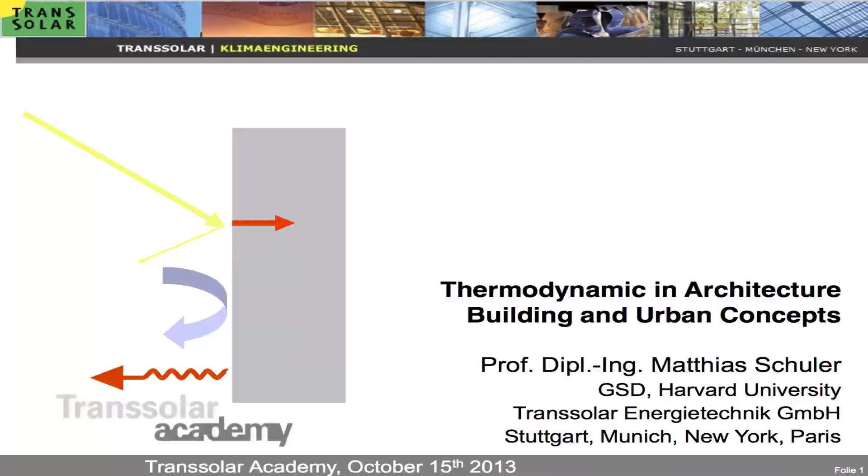It looks like sustainability is such an overused term that people feel like, oh my God, I have heard enough on sustainability. So if we start to call it thermodynamic, we may have a better impact on people. And I will just explain briefly how I define it.

What sustainability means for buildings and cities. Then our approach, you have seen already some of this from Thomas, and then I'm trying to explain 3 projects. Let's see how far we get.

The first one is a school, a design school in Essen we did with SANAA. Masdar City, you may probably know, that's this first carbon neutral city approach in Abu Dhabi. And then the Ansa Hospital is a hospital we did in Rwanda, which is not yet built, but conceptual work on it.

Okay, so defining sustainability for buildings and cities, we put definitely the people first, which means we first said, okay, our approach is to deliver high comfort for indoor and outdoor spaces.

I had an interview this morning where I mentioned why we focus on outdoor as well, because we are using more and more indoor space per person. The numbers for Paris, for example, they started in the 60s with 25 square meters per person. Today they are at 45. For 2030, they're expecting everybody needs 65 square meter living space per person mean value, which means the city is dying out because there are fewer people in the city.

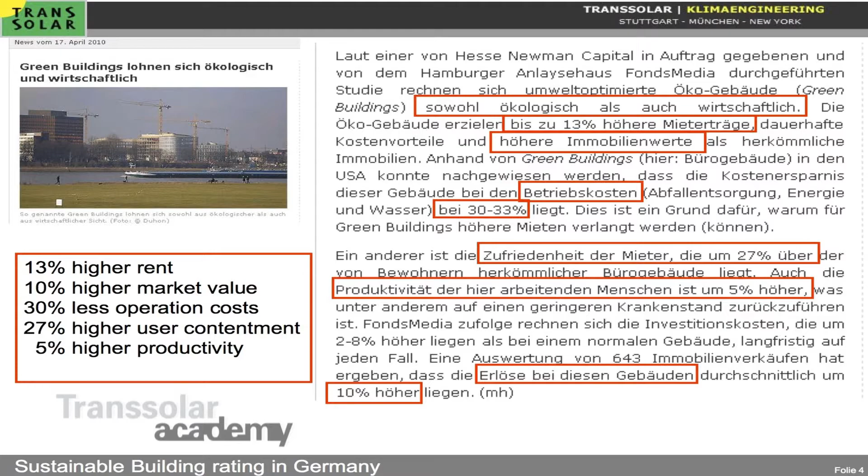So typically you get 13% higher rent, and if you get it on the market, up to 10% more market value. Typically the American evaluation for green building is that you spend between 5 to 7% more investment to get a higher performance building. So in a certain way you get a quite good payback, or at least it increases your market value.

You have around 30% less operation costs, which is quite interesting if you get tenants in your building, because they are running it on a lower cost. I think that's a big point, and Thomas probably mentioned it yesterday for Manitoba Hydro - people are more satisfied with the building, a better working environment, which is important because we build buildings for people to live and work in, and hopefully be comfortable. This kind of higher contentment leads typically to 5% higher productivity.

This is what American CEOs find quite interesting: if they get a better working place for their guys and get more out of them for the same salary, that's good business. This European number is interesting to have in mind, but the American number even partially goes up to 15%, considering their typical office can be in a basement without any daylight. If you put this guy at a facade instead, productivity can easily rise 15% because you feel much more comfortable.

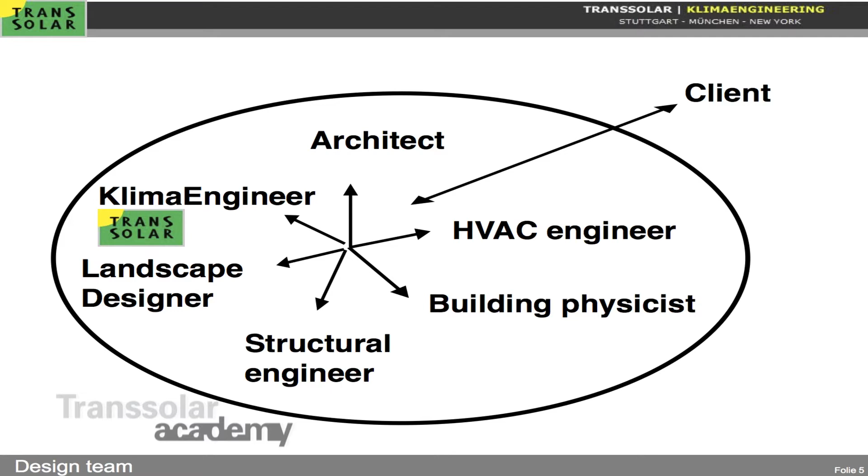We see ourselves as a player in a team. Some architects want to be at the top—I had another arrangement where the architect was not on top, and I got a comment from Peter Zumthor, who some of you may be familiar with. He got the Pritzker Prize in 2009, a quite known Swiss architect, but a big egocentric—he wanted to be up there above the team. But this is kind of how we see us.

We see ourselves really as a player, exchanging coordination information in the team. We are definitely not experts in building physics or structural engineering—we are experts in climate engineering. The information exchange necessary between disciplines is important, so everybody is aware that if someone changes one parameter on their side, it may affect another discipline in the team without them realizing it. It's important to push this sensitivity in a team, to exchange this information and get people on the same level.

If we approach a building with respect to indoor comfort, there are different aspects. It's not classically the air temperature as the definition, but more like the operative temperature—the temperature you feel, which has a lot to do with surrounding surface temperature. Even in the American code, they talk about room temperature, and if you look it up in ASHRAE, they mean the operative temperature, not the air temperature. A lot of people misinterpret it as air temperature.

You've seen this—these are our tools: simulation, temperature, airflow, and light, where based on these physical principles we evaluate our concepts, which takes a significant part of our time.

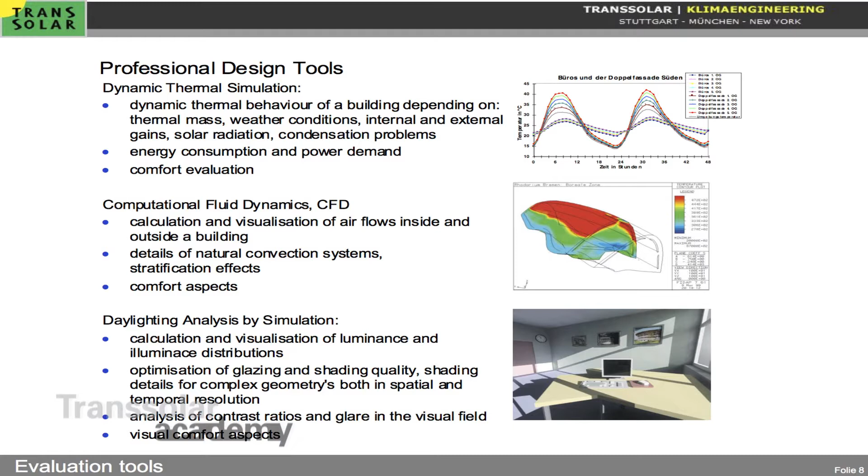From time to time we even use one-to-one test measurements, because if you build a big building and propose something and it wouldn't work—some clients feel much better instead of just seeing a fever curve, which makes them nervous, being able to walk into a space representing the concept they'd get at the end and feel like, okay, it looks like it can work. It won't give them 100% security, but a much better feeling.

Jumping into the real projects, this is a project in the middle of Germany. What's interesting in respect of sustainability is that this was an old coal and iron mining site, in the center of Germany, in Essen. This is a UNESCO World Heritage site.

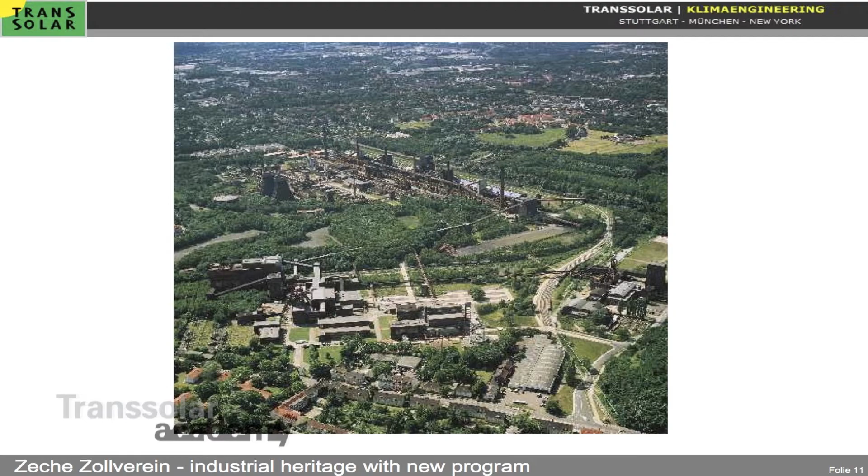This is where they changed coal into coke, a special kind of coal you can run at high temperature to get the iron out of the ground. This is an old mining site—they dug for like 85 years. The Ruhrgebiet is in the center of Germany; this was our main industrial ground where they dug and produced steel.

They dug for like 85 years, and in 1985 they closed this mine. Out of political reasons, it became cheaper first to import coal, then cheaper to import steel, so the German coal and steel industry nearly died out. The whole region is still struggling because they lost their main industry.

Then they started new activities there—one was to do education there, and there was a competition.

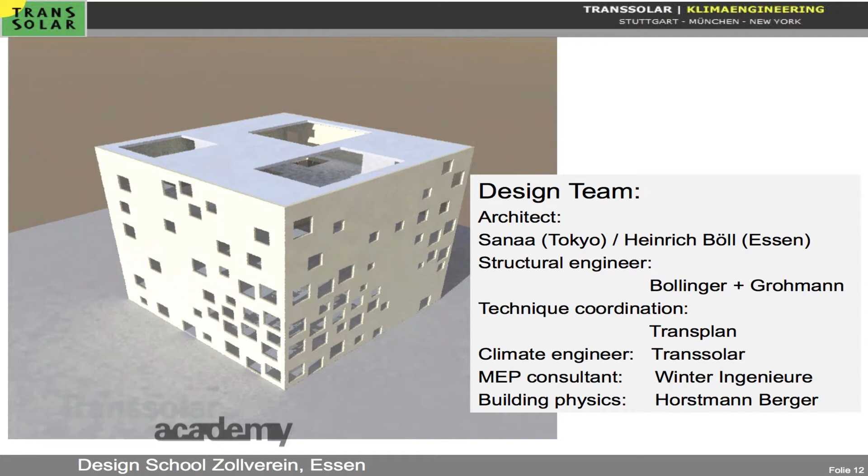That's the team: SANAA stands for Sejima and Nishizawa, two architects from Tokyo, and there was a local architect, Bollinger Grohmann, the structural engineer. Transplan is a Transsolar daughter company that does technical general planning and coordination. We did the climate engineering, an MEP engineer, and the building physicist—so that was the team.

They won the competition with a block. The building is 35 by 35 by 35 meters, so it's a perfect cube.

It's about 300 meters from the old shaft. Now what's interesting, in '85 this is where they went down to minus 1,000 meters. This is how deep the mines are in the Essen area.

In a certain way they stopped it, but they decided, for political reasons, since all the mines are governmentally owned, to close it but keep it dry. I'm jumping over the weather in Essen because that's a boundary condition to think about. But I think this is the 1,200 meter down there.

Now what they're doing, they're pumping permanently. They closed it, so they're not digging, but they're pumping day and night, 24/7, the mining water out to keep the mine dry, so maybe in 10 or 15 years they could decide to go for coal again. If they flooded it, it would be a bigger mess to get it dry again.

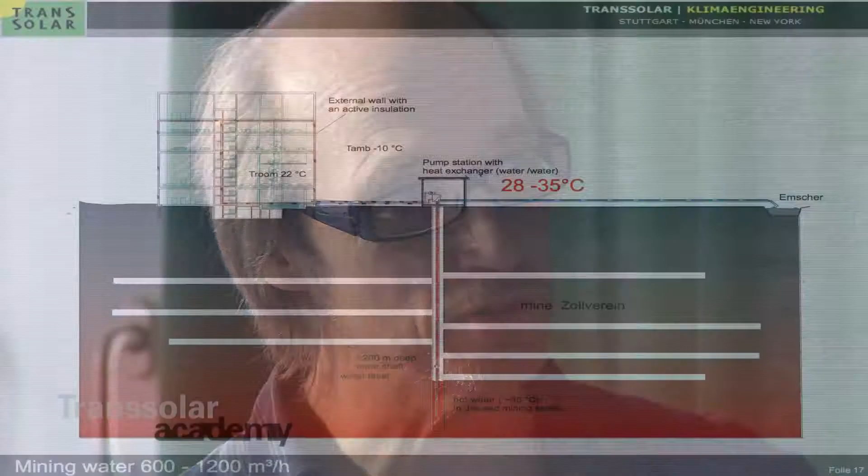What's interesting now, they're pumping out around 600 to 1,200 cubic meters per hour. That's a big amount of water. Now this water is between 28 and 35 degrees. It's warm. And it's heavy metal loaded.

What they do, they pump it into the next river, which in the first moment you think, give me a break, it can't be. They pump it into the next river. The Emscher is what I would call a public cloaque in Germany.

15 mines are dumping their mining water into the Emscher. Before the Emscher goes into the Rhine, there are 15 water purification stations to get the shit out. And this is working day and night, and will work for however many years to come.

Now, this is quite interesting because this was coal, they closed digging like 30 years ago. What's interesting is, they say, why don't we stop pumping? But if, maybe for political reasons, they find a new energy source, whatever, fusion reaction or whatever, the water would fill up.

What's interesting to have in mind: the whole Ruhrgebiet dropped between 20 and 30 meters in the last 100 years, because getting the coal out and the iron out, the whole landscape dropped. Now what's interesting, if they got the water up to around 200 meters, the ground would start to lift.

And there's one mine close to Aachen, near Cologne, where they did it. And there's one little village where, through the streets, through the houses, they have a shift of like 10 centimeters in one year, because the ground kind of lifted up uncontrolled.

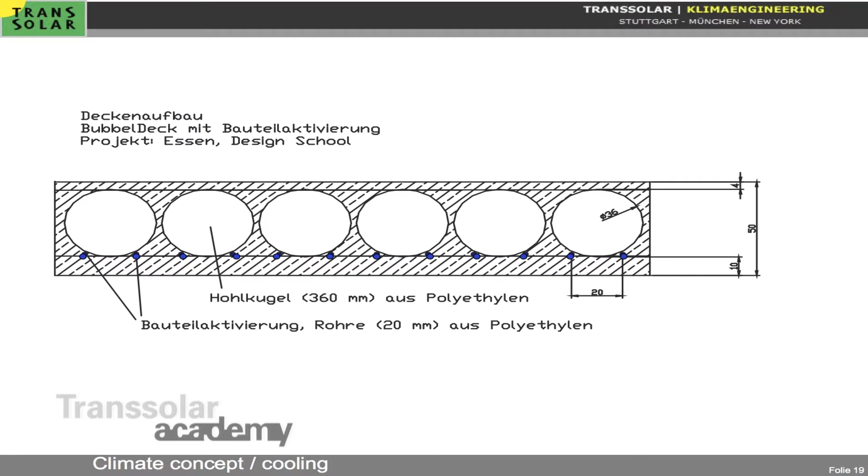They span 24 meters without a column, because Mrs. Sejima didn't want to have a column in the space. So they are 0.5 meters thick. Now, to avoid 0.5 meters of solid concrete, which would be a lot of dead weight, they used what's called a bubble deck. They put hollow core elements in, which take out around 35% of the dead weight.

Now we put little plastic tubes in to activate the ceiling as a source, and if you pump water through it, it works as a nice heating device.

That was one application. Then reflecting the German code, in American units, structurally they would need around 25 centimeters of concrete to have a 35 meter wide concrete wall without expansion cracks, because the architects were quite minimalistic and didn't want expansion tracks. They wanted concrete at the inside and outside, which together with a minimal German insulation of around 10 centimeters would be nearly 60 centimeters thick. So the little windows they had became holes, because they were as deep as wide.

So they were totally unhappy and said, can we reduce the insulation? I said, I'll give you 2 centimeters, it wouldn't help. So finally we said, okay, let's invent something called active insulation. Now it's a 12-inch monolithic concrete wall without any insulation.

It just has plastic pipes in it, and we're pumping the mining water through the pipes. So we're heating the wall as if the building would be insulated, keeping the inside surface temperature at around 16 or 17 degrees, as the wall would be with 10 centimeters of insulation.

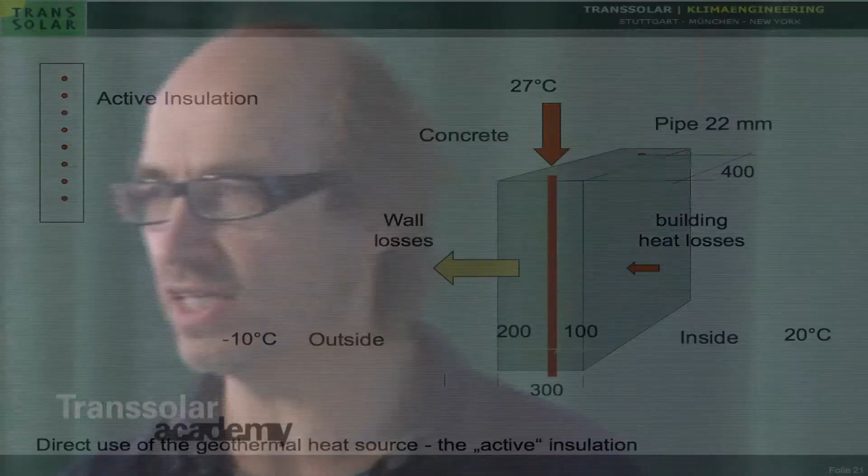It's clear we are losing like 80% of the heat to the outside. In a certain way we're limiting the inside heating losses, but we're still losing a lot of this free heat. So I said, before pumping it back into the mine, why aren't we using it for the building?

What was interesting as a side effect: we saved like 1.5 million in investment, because the double shell concrete wall was much more complicated to build than a monolithic concrete wall with some pipes in it, which the contractor found easier too.

This was an example where they asked for a reference, and I said, no reference, but we can show you that we think it should work. Make sure that if a pump fails, it doesn't break, whatever. So it was a big hassle, but we convinced them and got it built.

Finally, the loops aren't looped closed, they're open at the end. So in case of a pump failure, we can open a flap at the end and get all the water out before the wall freezes and breaks up. So that was some safety measure.

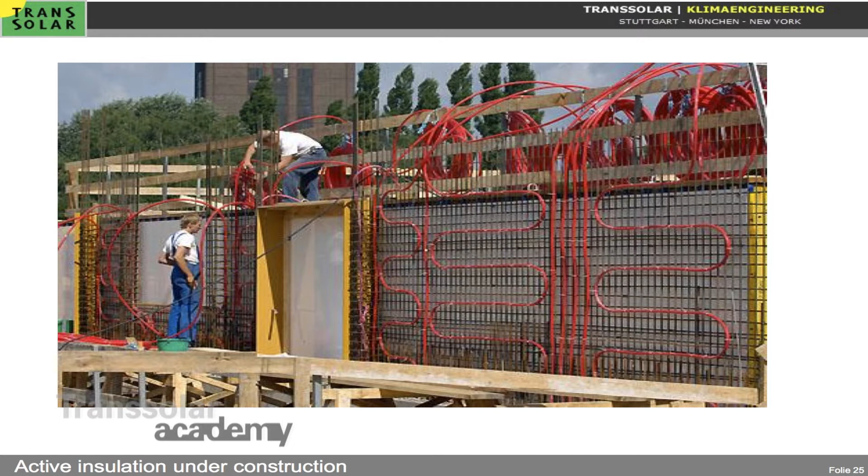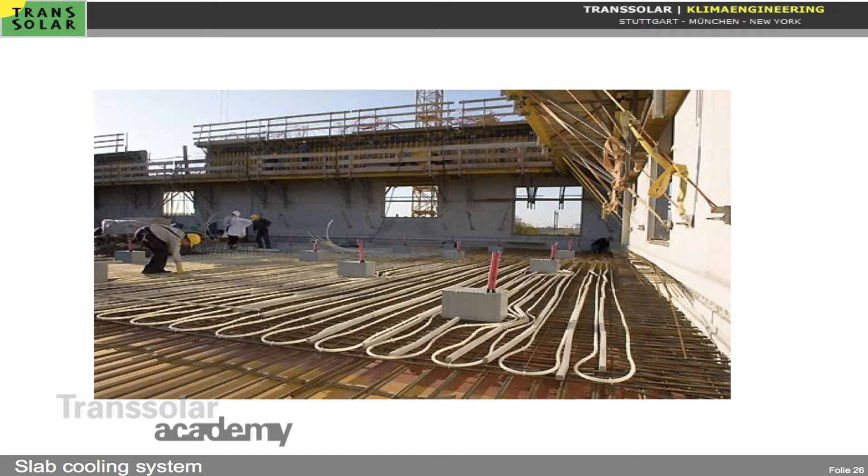As the building grew, you can see the pipes below in the 0.5 meter thick ceiling, where the bubbles come above in kind of cages, and then you pour the concrete above it.

Here you see a little manometer, a pressure control, because you're pressurizing the pipes during the concrete pour to ensure maximum stability, and you can always find out if you have a leak in the system, which as long as nobody drills in, we seldom had.

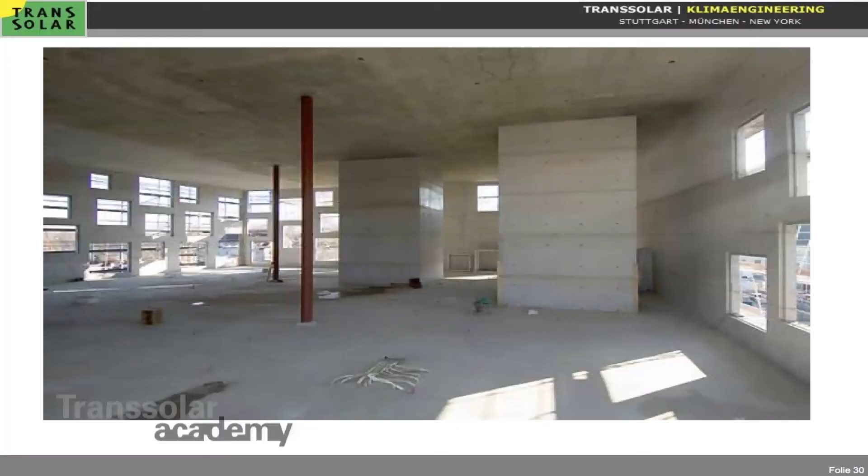This is where the pipes come out from the floor below. We typically have a raised floor, so you can connect to this embedded system. The concrete is all exposed, and you see finally they got some columns, but not as many.

The 12-inch, so the 30 centimeter thick wall, which is still 30 centimeters, but compared to before, with smaller windows, it was quite minimalistic.

Inside, the flush windows, flush to the inside, we said okay, we need shading because we still have around 30% openings on the facade. So we got a curtain which has like 10% transmission. This is enough for keeping the heat out and getting partially some light in.

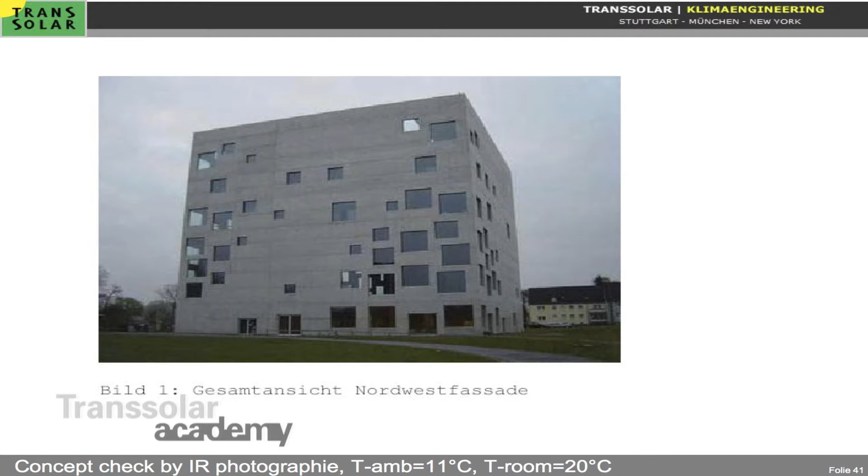What's interesting, not us, but other people did a check on it. Unfortunately it was not very cold, it was only 11 degrees, so they did an infrared kind of picture. And what you can see is the areas where it gets colder - this is the roof terrace. So the areas where you have the active insulation, even to the outside, are warmer because it's pushed from inside.

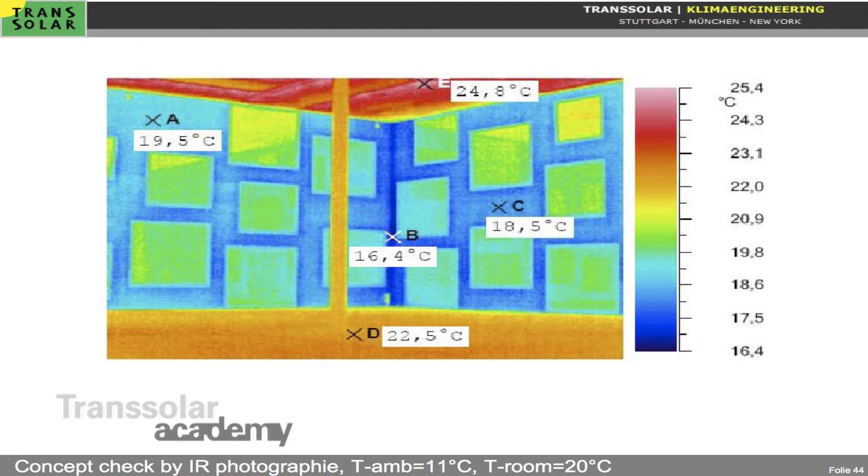Now, looking from the inside, what you can as well easily read is the warm ceiling, which is kind of your radiant source, and then the walls are tempered to stay in range. In the corner, it's clear you get the heat conduction maximization, you get more losses, but then at the surface you stay in the range of the room temperature.

Final picture, the curtain. Now, we are aware that an inside curtain, if the sun hits it, gets warm. How do you prevent that you don't feel close to a radiator? This is now about radiation.

If you put a kind of metal coating on it, a so-called low E, low emissivity coating, because physics tells us the heat radiation coming out of a surface is proportional to the emissivity factor, which is a material property. So if we do an aluminum-coated curtain on the inside, it may heat up, but the warm air would typically rise and be exhausted with the exhaust air. You sit here at the table and don't feel it, even though the curtain may be 30 or 40 degrees, because the low E coating cuts down its ability to emit heat.

What is interesting, in the infrared picture, low E, because the transmission is 0, becomes as well a high reflector, because absorption plus transmission plus reflection has to equal 1 — the Kirchhoff law.

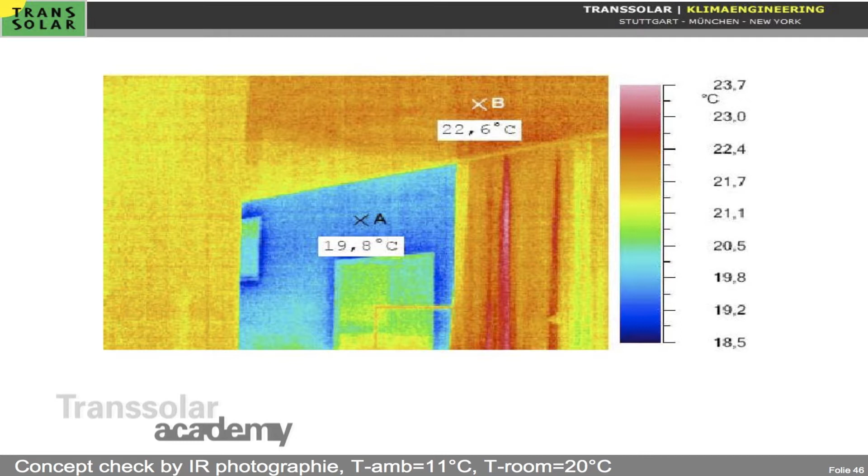So what you can see here, in the curtain, you're reflecting the warm ceiling and the warm shaft in the middle on the surface of the curtain. The curtain is not as warm as it shows in the picture, but it reflects the warm ceiling being reflected in the low E coating, which doesn't emit. But if something doesn't emit, it becomes a mirror — a long-wave mirror.

I think that's quite an interesting picture to look at. You can see that even in winter, the curtain would provide a certain increase in comfort, because you wouldn't see the cooler wall, which is at 20 degrees, but would see more like a surface of 23 or 24 degrees being reflected from the ceiling in the curtain.

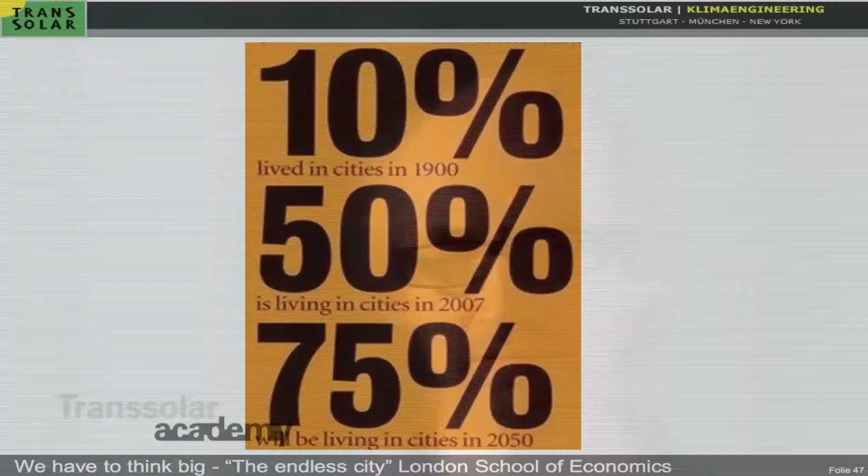Some of you may have seen this book. It's a good book — we have both books here. This is the first round, and then two years later they did a green one, from the London School of Economics. They called it The Endless City, evaluating the statistics of cities. In the first book they had about 10 or 15 indicators; in the second book there are another 10, about density, criminal rates, life expectancy, energy, air quality, and more.

They said we have to collect this material, because in 1900 only 10% of people lived in cities. Now we're approaching — in 2007 it was already more than half of the world living in cities. By 2050, it will be 75%.

The question is what is the definition of a city? Because if you go by the German definition, today 75% of the German population already lives in cities. So where is the range of a city — do you start counting from 1 million, or from around 100,000? I think that's a question to ask, first to clarify the definition being used.

That was a background for us to think about. We got an invitation from Foster and Partners to work on this — it was first a competition for the first zero carbon footprint city in Abu Dhabi. This is the team: Foster and Partners for architecture and urban design, Systematica for traffic, WSP with the energy concept and MEP, Flack and Kurtz, and ETA for solar systems, plus a landscape designer from Florence. So it was a big team working on this.

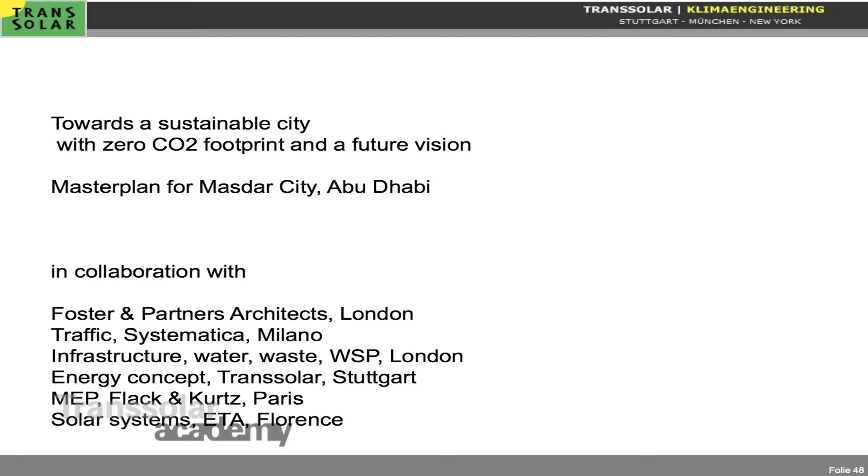The approach was to say, okay, this is Abu Dhabi today. What is interesting is this is Abu Dhabi in 1960 — this castle is right here, but there was nothing else, just this little castle and sand and some fisher huts. In about 40 years they changed from nothing to a city where you can already read a grid. Most interesting, this is exactly the grid of Manhattan — they copied it one-to-one.

This means you have an avenue which is 75 meters wide. I can tell you, to cross an avenue in Abu Dhabi when it's 47 degrees in the shade outside, and in the sun you face like 60 Celsius, 75 meters is quite long — you nearly don't reach the other side. This is why Abu Dhabi people use a car to cross the road; they drive to the other side to make sure they don't get a heat shock.

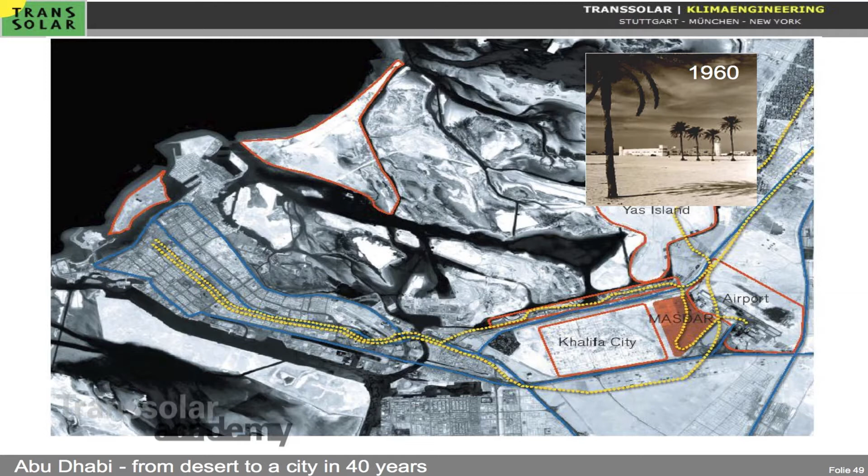I think this is an example where you transfer an urban design into a totally different climate, ignoring everything. So, this is Masdar City, close to the airport. If you've ever been in Abu Dhabi, this is the existing airport, and there's a new airport by KPF under construction here. Masdar City is a site of around 600 hectares donated to show the world that you can build a carbon neutral city today.

The background is that in 2004, the UAE were blamed to be the worst in the world, having the biggest ecological footprint per capita. Not in total, because they're such a small population - the Chinese would always win on that measure. The WWF does this every year, counting the ecological footprint per capita for each country in the world, and in 2004 the UAE got the red light.

What's interesting is this reflects a bit of Islamic culture - they felt much more blamed, not because of their beliefs per se, but because Sheikh Zayed, the father of the current emir and founder of the UAE, had emphasized that what your forefathers defined for you and for the future is quite important as a rule. He defined that you should treat your country as your forefathers did, and respect the habits and potential of the land for future generations.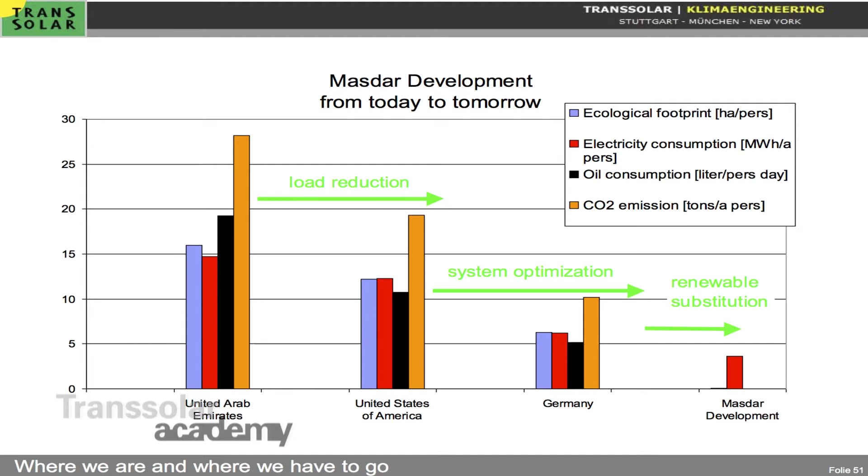Now, this is the kind of urban program. Around a university which is about 200,000 square meters, they were thinking of a big technology park, commercial, big resources, research units of around 1 to 1.5 million square meters. They're thinking there should be around 50,000 people living there with their families, so around 1.5 million square meters of housing, plus a support structure. In total, we talked about 5 million square meters on a land area.

Which was at the end reduced, because the sheikh in between gave a donation to a friend of his, so we suddenly lost 50 hectares. We had 600 in the beginning, and then one week we were told the sheikh donated 50 hectares to another guy, so we had only 550 left. But compared to the 5 million square meters, you see this is a FAR of like 1—the ratio of useful area to land area—which they think, and this is always the big pressure on Masdar, is a waste.

Because for comparison, we did the neighbor plot, and the neighbor plot has a similar size, but they built 25 million square meters on the same plot—so more a coverage of 5 instead of a coverage of 1. But energy-wise, this would never work.

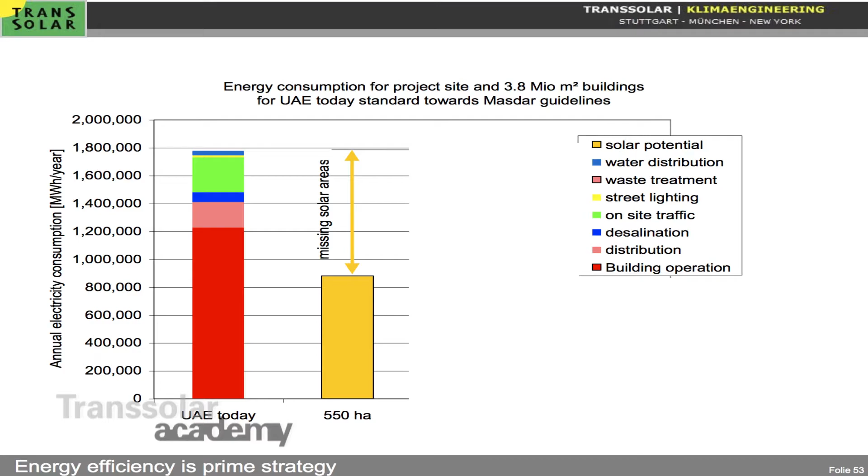Okay, so that was in a certain way a good starting point. Then we said, if we take these 3.8 million square meters of conditioned areas, and we take today's consumption of a typical hotel, office, housing project—the typical program—put it together, and add all the energy for the city, street lighting, traffic, desalination, distribution into account, we were at 1.8 million megawatt hours. Now, if we covered the whole site with photovoltaic or solar systems at 10% efficiency, we would only get 50% of this production. So it was obvious that we could get it down to half, but then the message would be that living in a carbon neutral city means you have to live in a solar plant.

If that's nice or not, something to discuss. We said, but this would be the wrong message. So we said, we have to get this much further down to be able maybe to cover only half of the site. This made clear that energy efficiency, which is better in respect of economy, is the first step to do. We have to get the loads down so we consume less, and then think about substitution.

Now, just a short recap of where we are. I was not so familiar, we call it in Germany typically the Persian Gulf, but I learned it's called the Arabic Gulf. If you're in Abu Dhabi you better say the Arabic Gulf. This is not the Persian Gulf, no, because Persia, Iran, is just here.

What is interesting, it has just this little connection, the Strait of Hormuz, to the Indian Ocean. This little connection makes this ocean much more special, because you typically have only a depth around 30 meters - a very shallow sea. Because of this small connection, the salinity of the Arab Gulf is typically 30% above the world oceans. World oceans are in the range between 33 and 35 ppt. The Arab Gulf is today at 45.

What is interesting, marine life like the corals and the mangroves, they die above 50 ppt. So already the mangroves in the Arab Gulf only grow up to 8 meters high. If you go to Australia or South America and look at the mangroves, they grow up to 30 meters. So the salinity already squeezed them down in height.

So it's quite special, and because it's so shallow, it gets really hot. In summer it gets up to 35 degrees Celsius. On the other side, in winter, it cools much further down than the Indian Ocean. So this is more like a big lake.

Looking at solar - where's the sun where we are, the sun is quite high, coming right from the zenith. In summertime you have quite good solar, close to the maximum. I think the maximum on our planet is close to 2,500. So that's a quite solar-beneficial site.

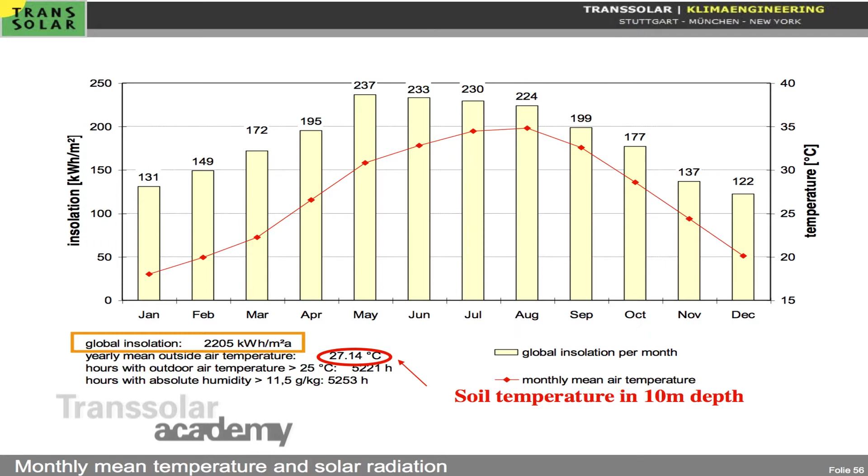What is interesting, the mean outside temperature is 27 Celsius, which in this case is also the soil temperature at 10 meters depth. If you go here in Germany where we have 9 degrees Celsius, you drill down to 10 meters, you find 9 degrees. Because you can imagine the outside temperature does like a sine curve, and the ground at a certain depth follows less and less, finally hitting exactly the mean value.

This made clear this is not a big source for natural cooling, because if you dig down to 27 while it's 47 outside, it's still cool, but not enough to drive an air conditioning system. And we had like 5,000 hours above 11 grams, so it's not only hot, it's also very humid.

So that is what we call the hourly fever curve of a site - the hourly temperature values of Abu Dhabi, and this is temperature in the shade, not in the sun. In the shade you get up to 47, and on the cool nights, those are in the range between 28 and 32. So that's in a certain way what you are facing.

That's why they left Abu Dhabi in summer, because it's typically not the nicest climate to stay. In winter, in so-called winter, you get at daytime 25 degrees, at nighttime this is like our summer.

You missed it, but you'll get it next year. Okay, hopefully a good one.

So in a certain way, that's what you are facing, that's something we had to have in mind. There are some changes, but looking at the city, nighttime temperatures of 30 degrees are still quite high.

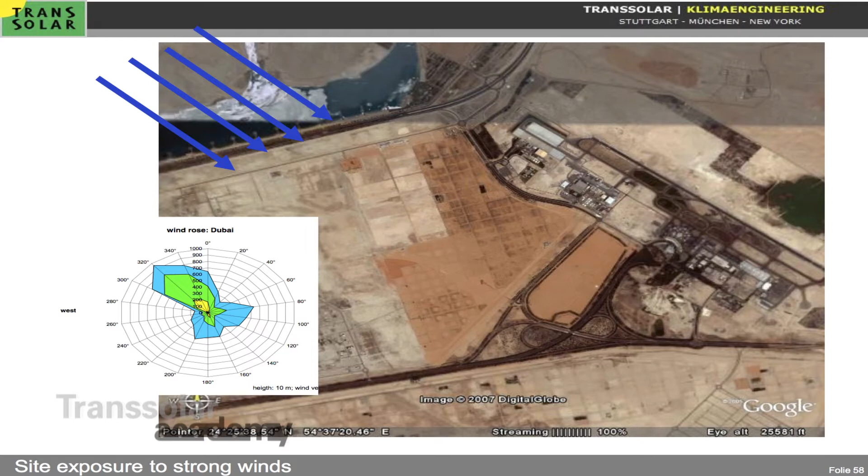Wind, which is interesting, typically comes from the northwest, and the northwest brings it right through the Arab Sea, which is why I mentioned the high temperature. It's then crossing, because typically this is the wind which comes from Iran, from Persia, which is a continental wind, and in Persia it's perfect, dry, cold. They have this evaporation cooling effect, which is why they build wind towers in Abu Dhabi and in Dubai.

This wind is hot and humid, because it collects all the humidity from the Arab Gulf and gets additional heat on top. So you get on a hot day 45 to 47 degrees Celsius wind, with a humidity in the range of 45 to 50%. If you cool this down to 25 degrees, you're far above 100% humidity.

So that's a source where we said, okay, having this in mind, our city has to be able to respect that. We looked at how nature survives in such harsh climates.

The Dorcas gazelles, for example, are a local species living in the UAE. They can survive for months without drinking, because their kidneys - our kidneys, we have to drink like 1.5 liters of water to flush them - but they can survive without any water, just the water they collect from the wet grass.

It cools down to 30 degrees, so at nighttime you're reaching nearly 100% humidity. So what the beetle does is put its back to the sky, cool down its back, and get condensation, because it has a high hygroscopic coating on its back, which also has the lotus flower effect, meaning the droplets don't distribute but stay as droplets. Then it lifts its back and drinks it in.

That's the drink of the day, the drink of the day. It survives for the next day from this water droplet collected in the morning.

It's quite interesting - researchers at MIT developed a facade coating, copying the performance of this animal, saying if we apply this, for example, to a triple glazing or double glazing where there's no heat coming out from the building in the morning, we're able to collect water.

So that's the program finally, as well as the layout for the city. Now urban planning is a special chapter, I can't step into it fully, but a livable city is also about where certain programs are placed, so in a way, they try to put the university in the middle.

The blue is all the 1.2 million square meters of research zone, and the yellow is typically residential. There's some violet, which is production. We created a square roughly 1.5 by 1.5 kilometers, so quite big, to be able to fit around 3.8 million square meters of program in there.

If you come from outside, you have to leave your standard car in such a parking structure. The round ones are big parking drums.

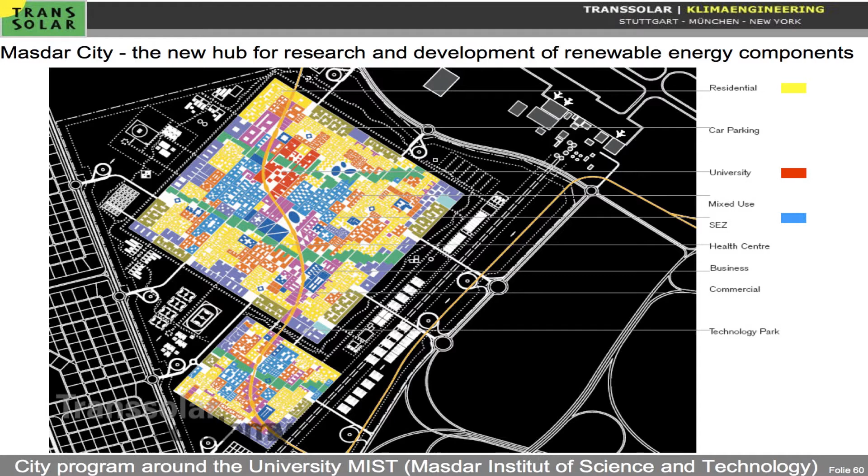Then you take a little electrical car to go into the city, because we said one finding was we have to build the city very dense. Now if you build the city very dense, you can't have cars polluting your city air.

That would be like, if you're ever in New York in summer, you can find out what car pollution in a street means, or maybe Delhi or other cities in the world are even worse. So I think that was clear - we wanted to push it as dense together, so it was clear we'd only use minimal city ventilation.

Because a 47-degree city ventilation would be a nightmare, since that means your streets are at 47. So we said we want to keep it minimally ventilated. It was clear this kind of reduction is what I call energy efficiency. Load reduction on one side, and then using better systems to provide comfort, should allow us to reduce like 70% of the loads.

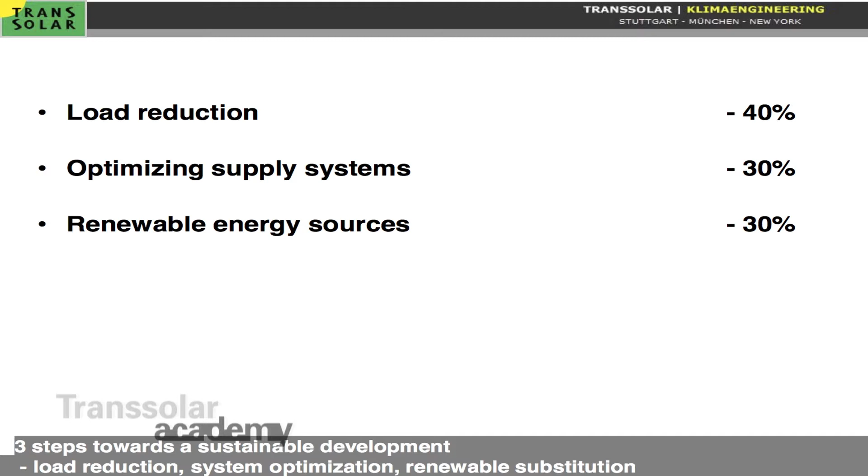Now, it's interesting, if you are in the desert in Abu Dhabi, the air temperature is around 46 — that's the maximum. The so-called felt or operative temperature, because you're in the sun facing the hot sand, is 67. Going into the city square of Abu Dhabi today, you easily get up to 71 because there's less wind, even though there's a little wind.

If you get into shading you may drop it down. You get vegetation — we looked at different strategies. Finally you can see, if we want to get it below the 46 outside, we nearly have to create a kind of microclimate of the city, changing it from a heat island that's hotter than outside into a cold island. So that was the challenge.

This is now the outdoor comfort approach, saying we want to keep this city as cold as possible. This means we have to have very narrow streets. They should be partially even self-shaded or artificially shaded. We need thermal mass to expose.

Our 30-degree cold night is a cooling source to keep it at 35, so we can ventilate the streets at nighttime and get the masses down. If we shade them, hopefully this mass helps us the next day. It was clear we can't get the 47-degree wind in — we have to keep it out. So make us low, keep us low, and hope the hot wind goes above your head, doesn't hit you. That was the kind of approach.

We looked carefully at the orientation of the city. This is a photovoltaic — we first saw it as a kind of retractable shade, and you'll see it in the animations later, in the real pictures. The photovoltaics are placed above the roofs, partially cantilevering out, so you get an overshadowing of the street. Combining on one side you're extending the energy collection, on the other side you get the shading effect.

It was interesting to look at, because we did tons of study as well, since it's clear that if you get the streets very narrow, you optimize the temperature in the street, but you cut down the daylight. So we kind of reinvented the North African structure — you find it in Syria, in Aleppo, you found it in Marrakesh — this structure of Islamic culture where typically the streets are very narrow and every house has a courtyard. Traditionally this courtyard was a private courtyard. Now, how do you transfer this, if it becomes a public courtyard instead of a private one? There were big discussions about how we had to do this.

Also, I know you already constructed a part of the city. So 35 degrees, is that a simulated number or a measured number? You'll see in a minute — it's measured. We could prove it, even if the example we could measure was quite small.

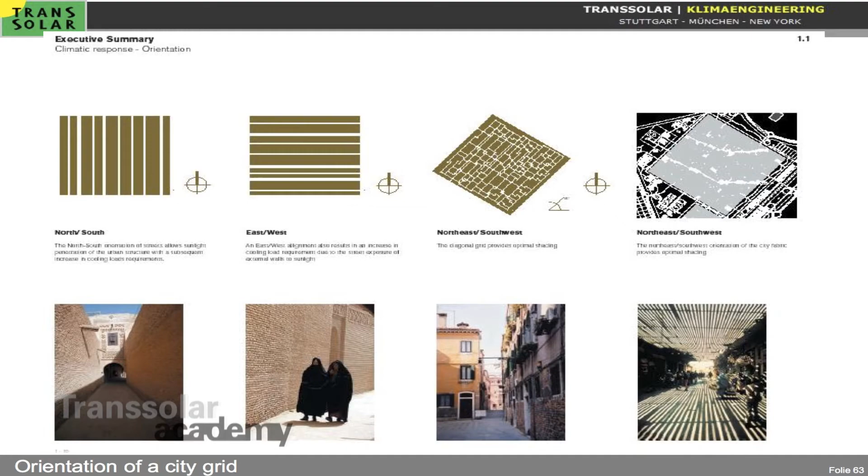So the orientation of the streets we looked at with respect to overshadowing and getting light into the city. At the end of all our iterations, we found out that the best orientation would be rotated 45 degrees to the north. What was very interesting, Thomas' group at the same time was working on a low-carbon city for Toronto, independent of us, and they optimized the orientation for Toronto. What did they find? 45 degrees rotated to the north was the best orientation, for a totally different climate.

Then you look into history and you see the city grid of Pompeii is 45 degrees rotated to the north. A lot of old Indian cities are 45 degrees rotated. It looks like that's a rule for our planet, a quite optimum orientation — Islamic Cairo too, the spine in Islamic Cairo also is. That's what I always say: we are not the big inventors, we are kind of the reinventors of what our forefathers already knew.

By inventing the chiller and the fan, we missed all of it because we said, okay, we don't care, we can just use the machine. So maybe we have to learn some of the old knowledge back.

This is interesting now in respect of a city, in respect of public transportation. If you don't have private cars, you need public transportation. Now, what is the typical distance somebody would walk to a bus stop or to a metro station? This is MIC, our traffic consultant friends from Milan.

Typically, for European temperate climate, this is the acceptance: people would walk, if you want to keep it in the range of 70 to 80%, between 250 and 500 meters, people would accept. That's how you plan in a city.

Now, if you are facing 35 degrees or more outside, the distance drops, because it's clear you don't want to be totally sweated reaching the air-conditioned bus. So it was clear that our maximum walking distance from your house or office to the next public transportation should be in the range of 100 to 150 meters.

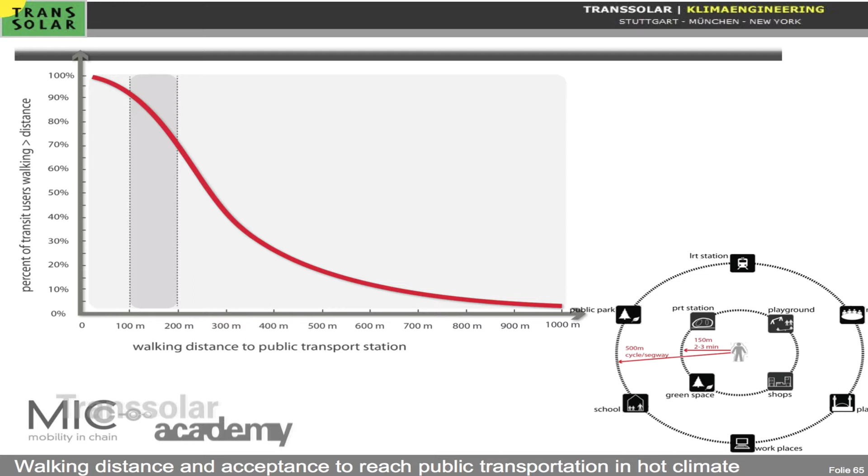That was a base for their layout. This is a little layout, and these are little underground electrical cars you'll see in a minute. So there are 3 layers of public transportation. There's a metro running to the airport, with one stop in the middle of the city.

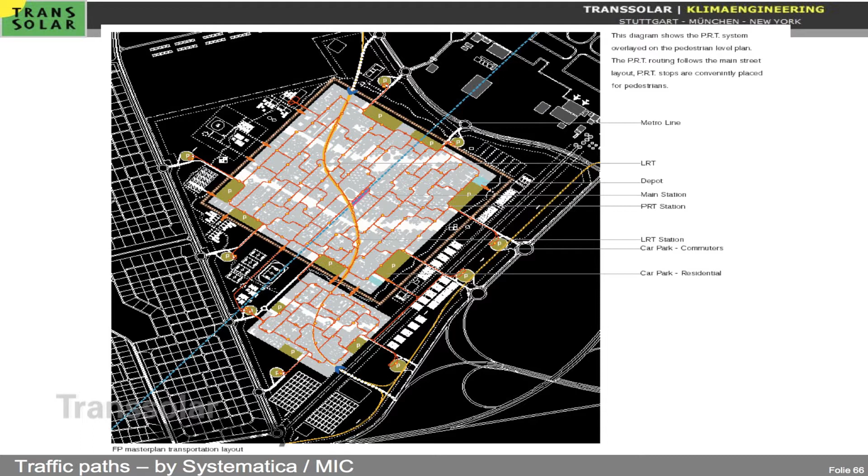There is a tram which runs above ground, which crosses the city once, and then there are these little dots which are the stops for the little electrical cars called PRT, Personal Rapid Transportation. If you want to experience them, they are working in London.

One of the outside parking stations has these kinds of fully automated driverless cars, which in London has 10 seats. In Abu Dhabi it will have, they already bought about 20 of them, only 4 seats, because, respecting the local culture, it was clear a woman should be able to travel in her own car without having to share it with a foreign guy.

So that's something we were looking at, to be able to go down there. It was clear we couldn't get it on the streets, because our streets are up here 4 meters wide, and here at the bottom in the arcades like 7 meters wide.

If you look on this section and go back to Nîmes or to Bologna or to a lot of old European or international cities, you can find these sections, because that was how they developed their cities. So we kind of reinvented it after a ton of simulation - we maybe have looked better in some old books.

It was clear there was no way to get these electrical cars on the street. You can go there with your bike and maybe with your Segway, but not with the electrical car, so they are one level below - you have to go one stair down. They are crossing here. What's interesting is if they cross the city, there are partially parks which are on the lower level, so you would cross these parks really at ground level, and there are sometimes openings where even the light would penetrate down to this area.

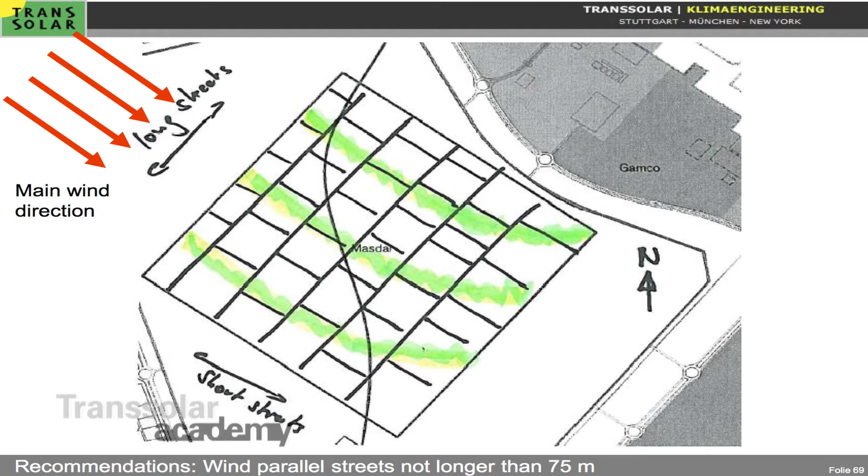He did the CFDs, and we found out that if a street in the wind direction is longer than 75 meters, even at an even temperature flow, the air would tend to drop into the street. So we said these streets are without problem because the wind is just going above it. We have to limit the length of the streets going in the wind direction to make sure as much as possible that the wind goes above, and then we get a jump, and then the next one.

We recommended introducing 3 linear parks, which would start at the northwest, the main wind direction, and then curve to the east, because sometimes at nighttime you get a cold breeze, 30 degrees, from the desert to ventilate the city. So that was, in a certain way, the intent of this sketch.

In a certain way you can see how they put it into a master plan. That's the length of this - some are longer, some are quite short. This whole city is kept on one level because it's clear if you had a high rise, it would work like a spoiler to get the air in.

So this is at daytime. We typically get the wind from the northwest. They reduced the parks from 3 to 2. But this is as well where we get the air from. This is where even at 47, 50% humidity, you have a certain amount of evaporative cooling.

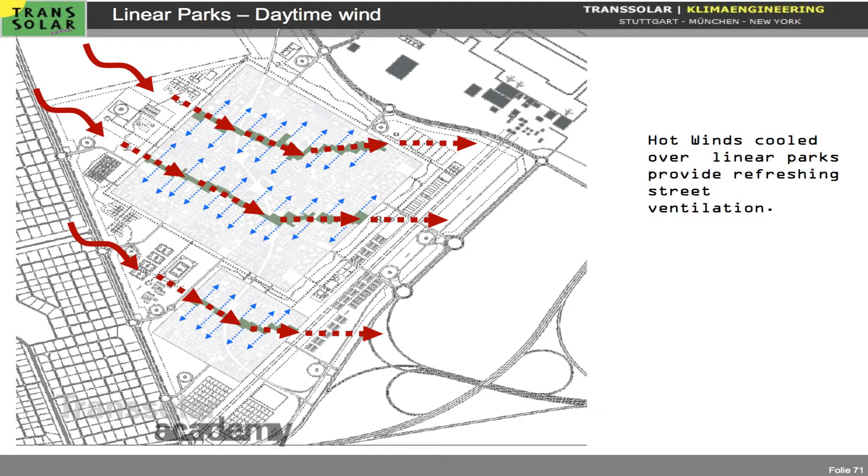So a densely linear park can do some preconditioning, and there you get the fresh air into the city. You need the air only for feeding people. You don't need the air for feeding cars or production or whatever. So it's only minimized to the amount necessary to ventilate a city for providing fresh air for the people, because it's a heat source.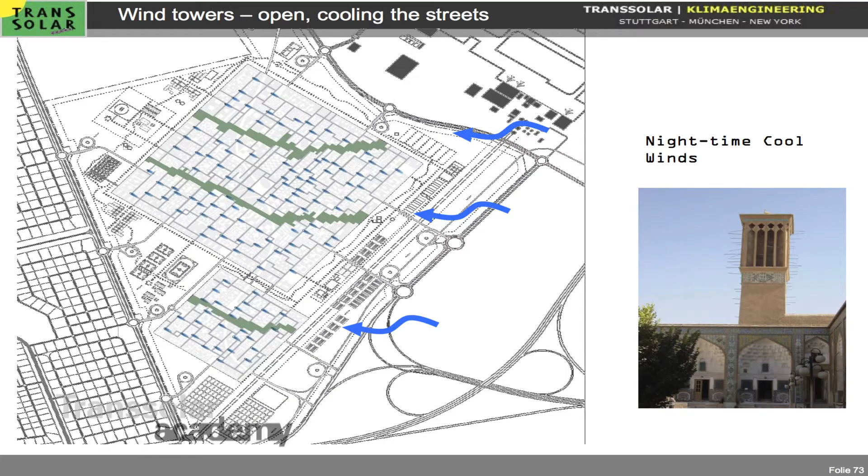So we said it's a good idea to put these wind towers at the end of each of our streets. At daytime, they work like a wind shelter, keeping the wind from dropping into the street, because the wind has to go around. Then at nighttime, I can open the top and catch as much as possible of the cool air and push it down into the streets, because making it tight at daytime also makes it tight at nighttime, where I want to let the air in. I think that's quite interesting, using a traditional building form in a new interpretation, not for indoor, but for outdoor, to optimize the climate in the streets.

That was finally our number: 80% reduction. And it was quite tough. There was a big discussion with the client, because some of these efforts are connected to investment. If you're saving 80%, that's a lot. It was clear they would need triple glazing, because with double glazing, transmission gains through the glass were still too big. So that was in a certain way settled. And what is interesting, if you see all of this, building operation is still the biggest chunk in the whole energy footprint of the whole city.

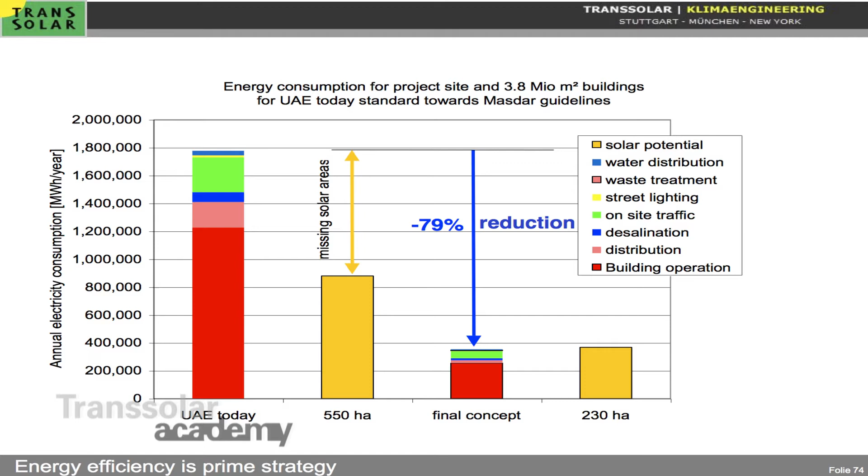But what is interesting, we were able to cover it with about half of the site. So that's the layout finally of the city. We have two linear parks. This is where the little electrical cars drive on ground, because the city is elevated, like 8 meters above ground. They come out from underground, shoot through the green park, and then enter into the next tunnel. This is the street line, and these are the outdoor spaces.

So we were covering, there's some solar plant at a certain edge, but we were trying to keep a big part of the site sort of unused. Because building such a dense city on such a footprint, typically 4 to 5 floors in height but very dense because we have narrow streets, you need a relief, because you may sometimes feel claustrophobic. So you may have to walk out, and we all know big dense cities have parks in a way to breathe.

What is interesting, that was a big discussion with the client, because people in the UAE said, 'Matthias, this is just desert, and desert is to build buildings on.' And I said, yeah, but this is your nature, you need it as a contrast to the dense city to go up. And they said, yeah, but Matthias, they will kill us, because they will tell us you can cover all of this with houses.

And I said, yeah, but then you will never make the energy balance. So that was kind of an interesting dialogue about the quality of indoor versus outdoor. What's interesting is that in such a harsh climate, outdoor quality isn't valued so highly, because people say, come on, at daytime I don't go outside, it's just too hot. So that was another point for us to rethink urban quality and outdoor quality.

Now, what was interesting is our system relies a lot on PV cells. We have only 2 or 3 windmills because we're too close to the airport, and you have to be below 40 or 60 meters here, though at the edge we could go up to 100 meters. So for a windmill, this is not enough height.

We have concentrating solar systems which can use big storages, but it was obvious we'd need to install about 150 megawatt capacity, while our peak capacity for the city is only 35. But we need to collect at daytime because at nighttime there's nothing. So where do we store it?

First the client wanted an island solution. We said there's no way to do it as an island solution because we can't store it. In Abu Dhabi, by law, you're not allowed to tap into the grid to charge the grid with electricity. So they had to change the law. They changed the law in two weeks. We proposed it, and in two weeks they changed the law. So that was quite interesting.

And I say, okay, that's something to discuss as well. In such a system, I learned the term non-elective system, where decision-making times are sometimes much shorter than in a democratic system. One of my provocative statements I always make in my talks is: we really have to think about whether we're able to face the challenge of climate change with our slow, democratic system, or if we need what people call an eco-dictator, a dictatorship, to turn the wheel.

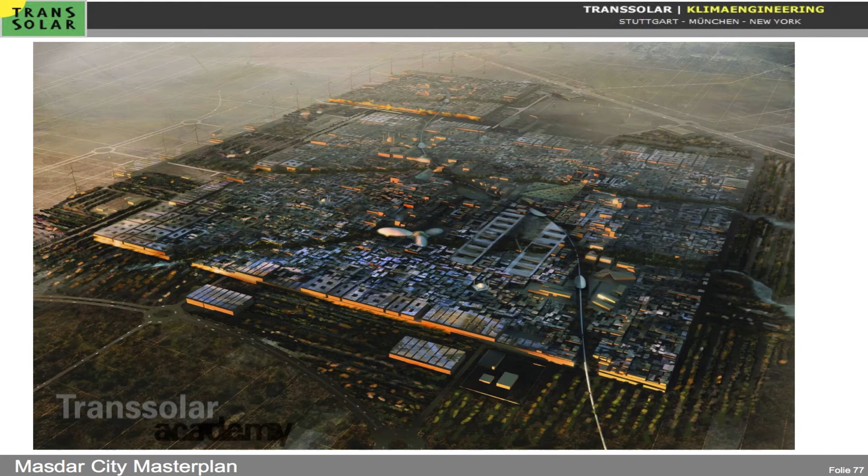Okay, that's the layout of how the city should look. That was the master plan. You see the rows of windmills at the edge, and the roofs are mainly covered with photovoltaic. There's the university and some cultural centers. The city is mainly on one level in terms of height, that's the dense city layout, and this is where the vision was for photovoltaic panels hovering over it.

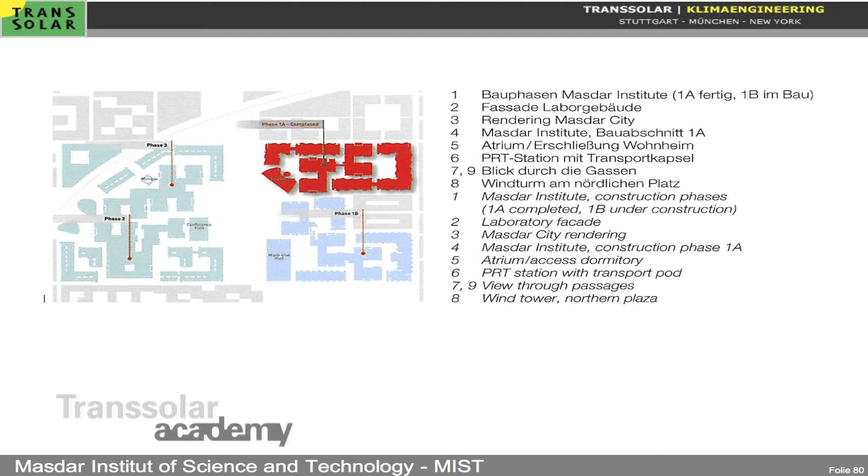So this is the layout of the whole university, around 200,000 square meters, of which 50,000 square meters are built today. They finished in October 2010, 50,000 square meters. So this is the platform.

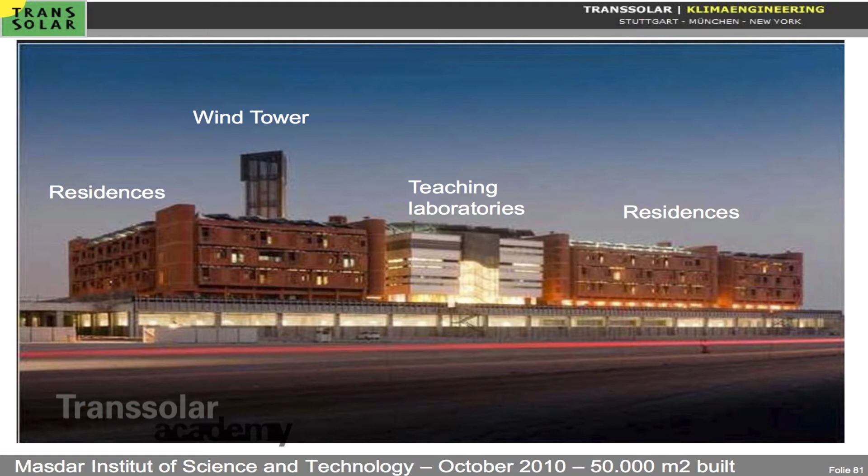This platform is 8 meters above the ground, which was also a problem because the ground is so bad. The first time we were on site with a truck, it nearly dropped into one of these underground caverns. So they said it's better to do this platform, and they're still discussing it now because they're spending a lot of money on it. So everything is raised about 8 meters above the ground. This is where pedestrians walk, and now they have residences, laboratories, and one wind tower to ventilate the city.

So this is the animation, and that's the real picture. They came quite close, I would say. What's interesting as well, for example, these are the residences. It was clear that with these narrow streets, what about privacy? So it's a reinterpretation of the Arabic mashrabiyeh, this kind of visual protection, which on the other side also gives us a lot of accessible thermal mass, because this is perforated concrete.

So this is our thermal mass, which we ventilate at nighttime, which stores the cool of the night to keep the space cooler during daytime. That's the wind tower doing this kind of night ventilation for our outside spaces.

Again, so you have some views to look out, but they typically go down the street, so you can't look on the other side of the street right into the face of your neighbor because it's so narrow.

This is the light situation indoor, because we get a lot of natural light, trying to get as much as possible natural light in.

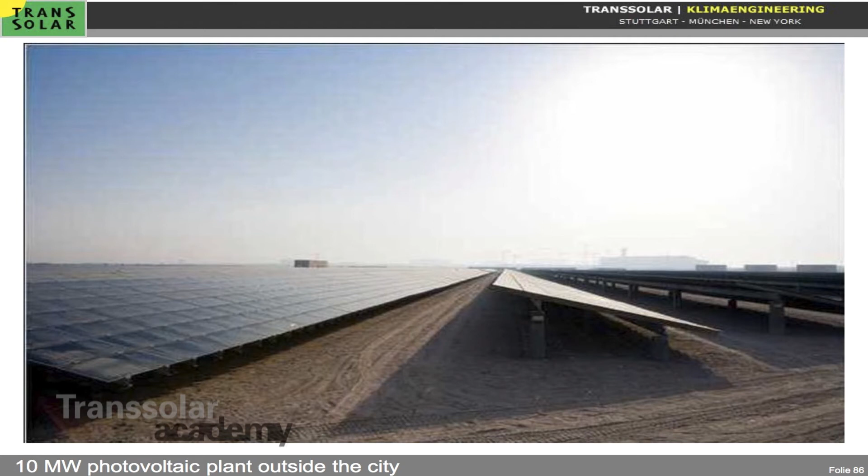This is the 50,000 square meters. This is a 10 megawatt photovoltaic system they already installed out of this 150. So they built 1% of the program and around, let's say, 5% of the energy production. So energy, they have enough at the moment.

That's not the problem. They find out the problem is the dust in Abu Dhabi. One of their climate points is they have a lot of dust, and everybody's complaining that they have to wash their cars twice a week to keep them white.

Now, the dust on the panels is really as well a problem, because after 2 weeks, they lose like 50% of their performance. So they have to clean them every second week, which is a nightmare to clean these big areas.

The problem is, in Abu Dhabi, and then we are back to radiation and condensation, because our humidity is so high, at nighttime, all the surfaces, seeing the cold sky, drop down, get condensation. So every morning they are wet.

And then you get the little dust settling perfectly on this, and then the sun comes out and burns it into the PV. That's the big problem.

So we are discussing at the moment with Saint-Gobain, the big glass manufacturer, if we would put a low-E coating, a hard coating, on the surface of this PV to prevent the long-wave radiation with the sky, we can keep it warmer. So in a certain way, it would not run into condensation.

In a certain way, we would get the dust on it, but in a dry form. And then we're talking with a little guy who invented a little robot for cleaning this with pressurized air.

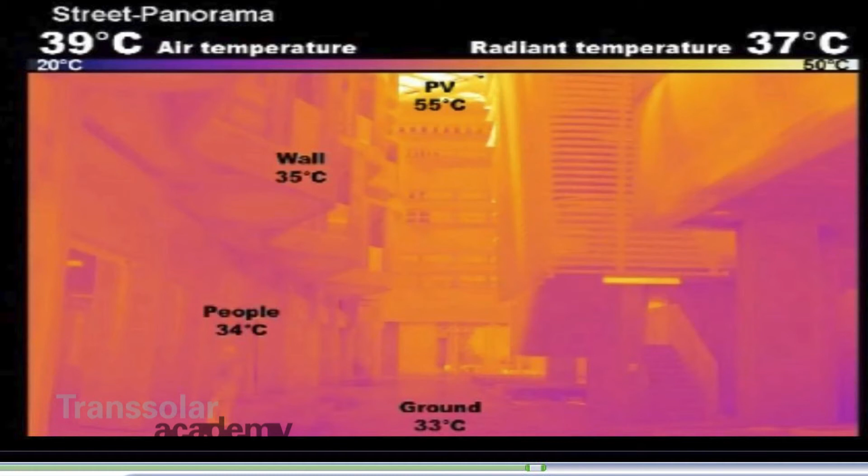This was the approach to look at the residential numbers. The reference they gave us for a typical residential project in Abu Dhabi was around 400 kilowatt hours - this is all recalculated to electricity, so 400 kilowatt hours for running a typical apartment in Abu Dhabi, including desalination of water and waste treatment. We designed it for 65 - that was our target. We measured in the first year, or they measured, 100.

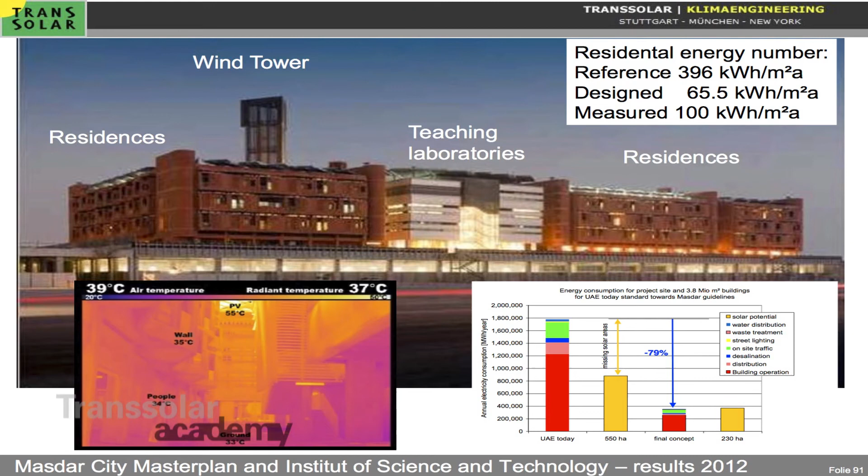If you saw Thomas's numbers yesterday from Manitoba Hydro, which took like 3 years to get it to the limit, I think this is quite even - that's a very good message, because they were like 50% above target in the first year. I think that's quite good. Politically, they're not very interested to share the numbers, because they want to keep the mystique of Masdar City and the Masdar Institute of Science and Technology, to attract as many people from outside as possible, because this is an education business.

We know one of the professors teaching there now, and we got the numbers through him. So I think it shows we're not yet there, but the direction is definitely the right one. I think the question they're discussing now is whether they would keep this kind of podium - Siemens is already building on ground, not on the podium. So it will change.

But I think all the lessons learned in the process - this part of the city was built in the process of developing this. It took us like a year for the master plan, and then another year to defend it. It was interesting - they decided after we delivered the master plan to give the next phase to WS Atkins, a big planning company, British-based but very active in the Middle East, to do the basis of design work based on the master plan.